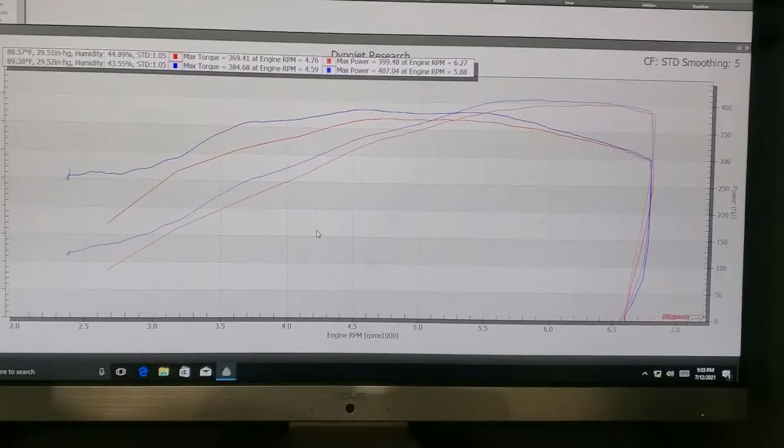All right, so I'm going to change this scaling and put it over speed and watch what happens. Let's first remove torque. The whole time, locked torque converter is well above unlocked torque converter as far as what it shows. I'll start giving you some points where you can do the math. Take a look at it. It's about 26 horsepower at 4,500. It's about 18 horsepower.

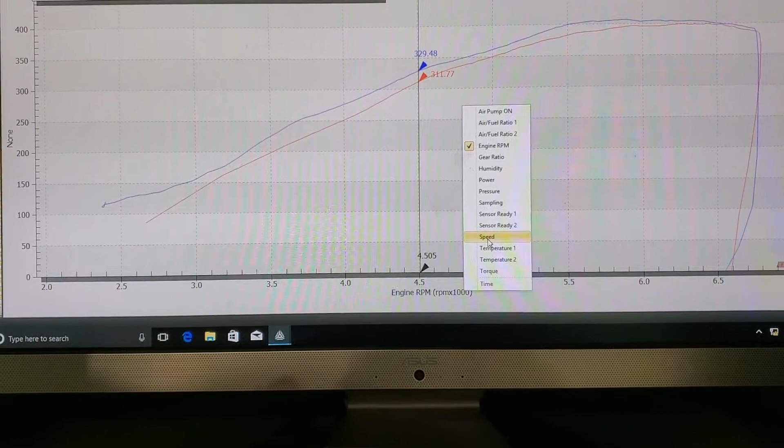Now let's put it over speed. By the way, this is an all-motor car that runs nitrous. I guess it's not all-motor, but these runs are on motor. Now that we switch it to speed, holy cow. When the torque converter flashes, which is what it's meant to do when you have an aftermarket torque converter, it gets you directly into your power band at speed.

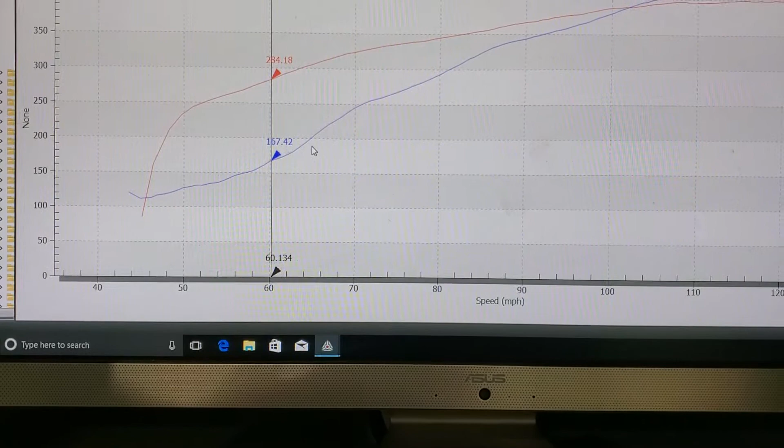So at 60 miles an hour, let me move this over just a little bit. You're talking 100, what is that? Almost 120 more wheel horsepower at 60 miles an hour you have with an unlocked torque converter versus locked. That is wild. At 70 miles an hour, you have about 75. At 80 miles an hour, it just slowly starts to lose the gains as the RPMs come up, as the torque starts to drop.

And then out here is where you might find it advantageous to lock the torque converter. Sometimes it's still not enough of a gain to really make it worth it, depending on your application.

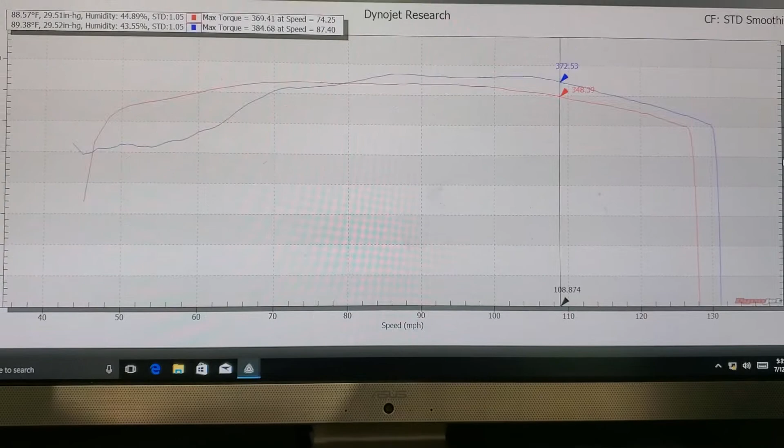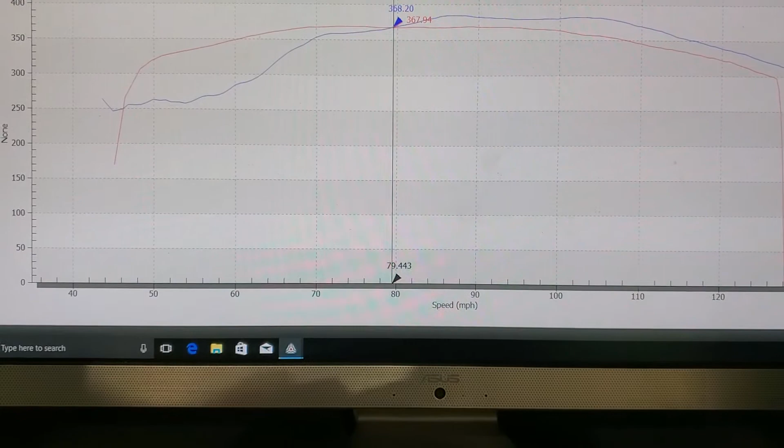So let's bring in the torque instead of horsepower. Torque, when you're first hitting it and you're starting off, you're talking almost 60 wheel torque more. And obviously, right around here is where the locked torque converter starts to take over. Let's see where that is, RPM wise.

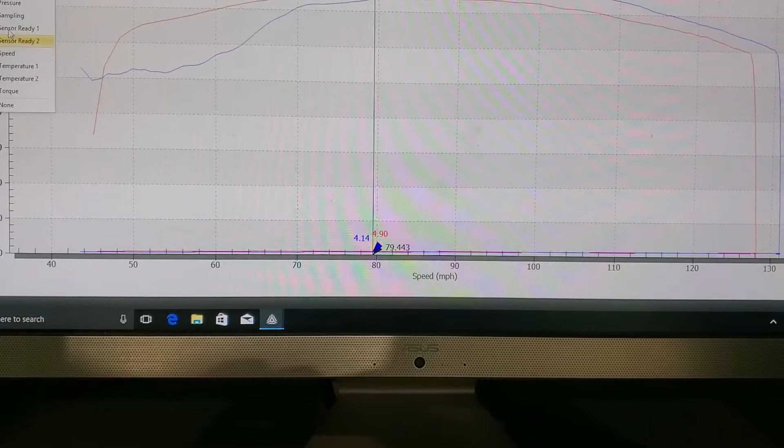Let's get rid of torque. Oh, let's get rid of horsepower again. So what you're looking at here is huge gains in horsepower and a good bit of gains in torque, until a particular mile-an-hour speed. When you're at the track, everything is about getting as much horsepower to the tire as long as possible.

So the way I handle it is unlocking the torque converter. Yes, there is some slip and you do have some losses due to the unlocked torque converter, but at the end of the day, if you ask me, it's a lot better to have it unlocked and test it and see how it does, and maybe lock it out here for the very minimal gains that you get, than it is just to go out and have it locked because it shows a better horsepower number. It's not going to be faster.

I'm going to turn the phone around again. I'm going to bring up a turbo vehicle and show you the same situation.

All right, one second here. Let's get these names out of the way. Once again, let's get rid of the torque.

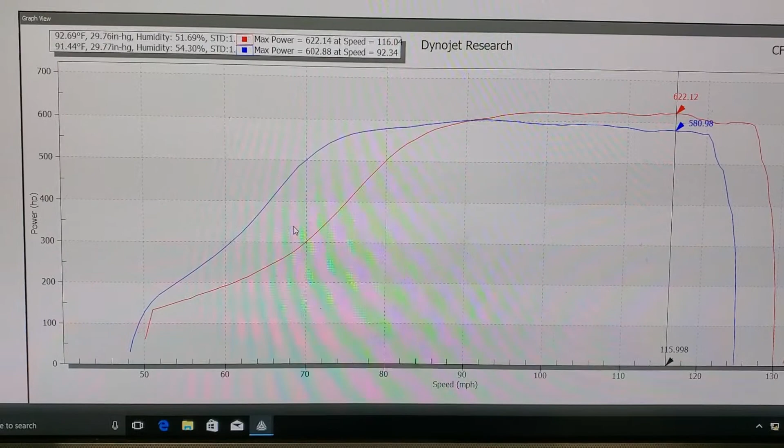There's a turbo car. You smash it with the torque converter unlocked. Well, actually, no, let's go back to RPM. A lot of people look at it.

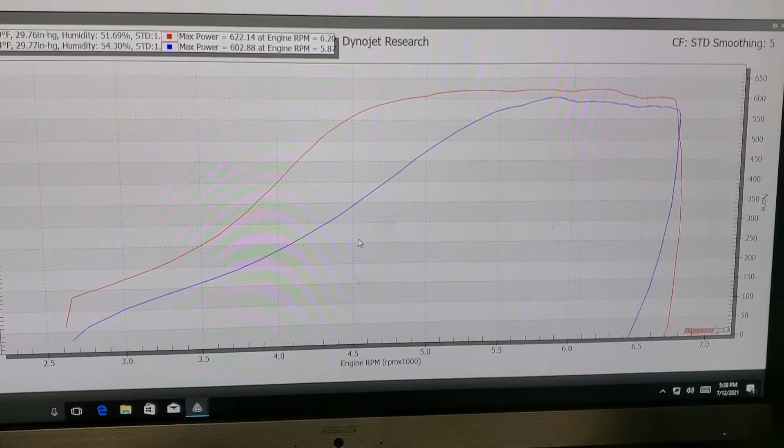Red versus blue. Blue is unlocked. Red is locked. And holy cow, doesn't that look terrible? That just looks like you want the converter locked all the time. Why would you ever want it unlocked? You'd be silly.

Well, let's put this over speed. You might want it unlocked for all these gains right in here. 200 wheel horsepower at 70 miles an hour. That's huge. Absolutely huge. Sorry, I'm not good at videoing and doing this stuff. It's not my thing.

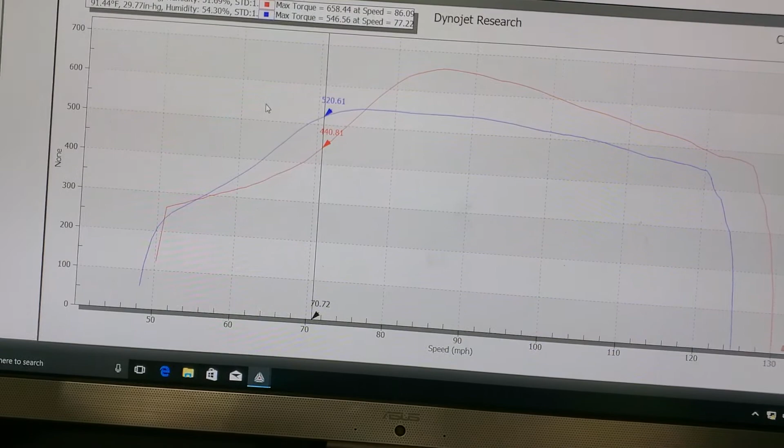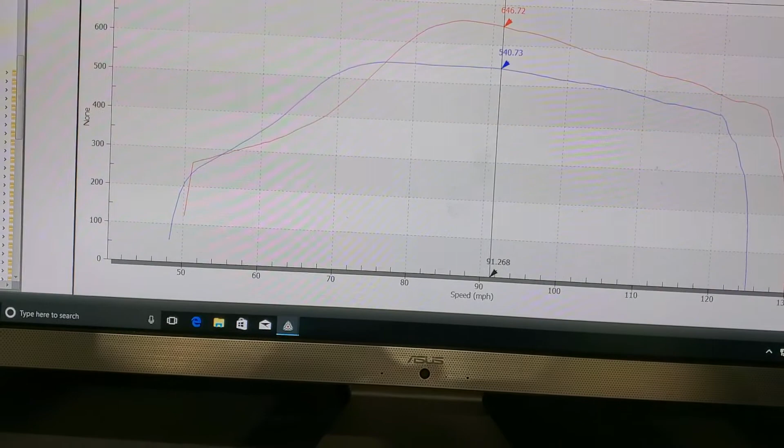There's the engine power. There we go. So somewhere in there, you would want somewhere between about here, which is 75 miles an hour, and about 90 miles an hour. You would probably want to lock the torque converter on this particular application. But you definitely wouldn't want it locked the entire time, because you'd be missing out on all this down here. All this fun.

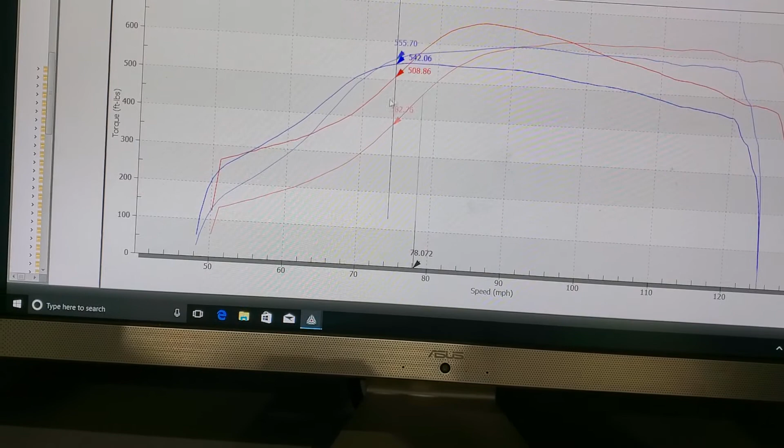So I hope that helps explain some of the reasons why I do some of the things I do, and that's just how I've come to find things. That's how things seem to work pretty well for me. You may have different experiences, you may find different things, but at the end of the day, trying it at the track is what's going to tell you.

And I find a lot of times that the unlocked torque converter is just going to work well for getting ET to a point. If you have a torque converter that you can lock up and is safe to lock up, it's something you'll want to start playing with at the track and see if it actually picks up time. Also, another benefit to unlocking the torque converter is a lot of times it's easier on parts depending on how hard you're pushing your setup. Locking a torque converter is like a stick shift car, put a lot of load down at a very low RPM. It's just hard on parts.